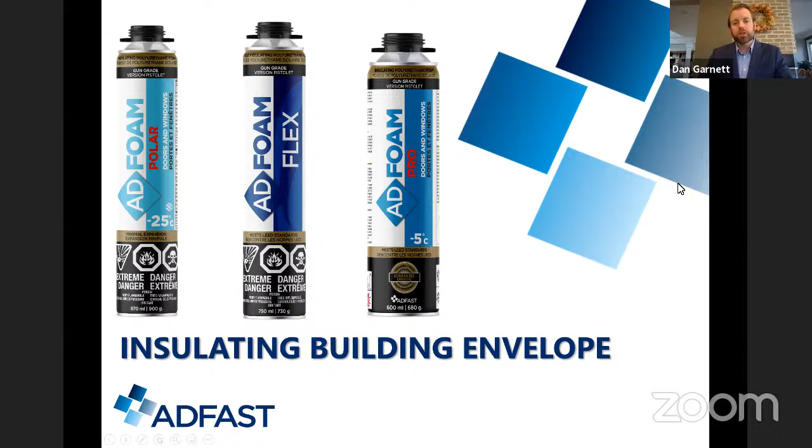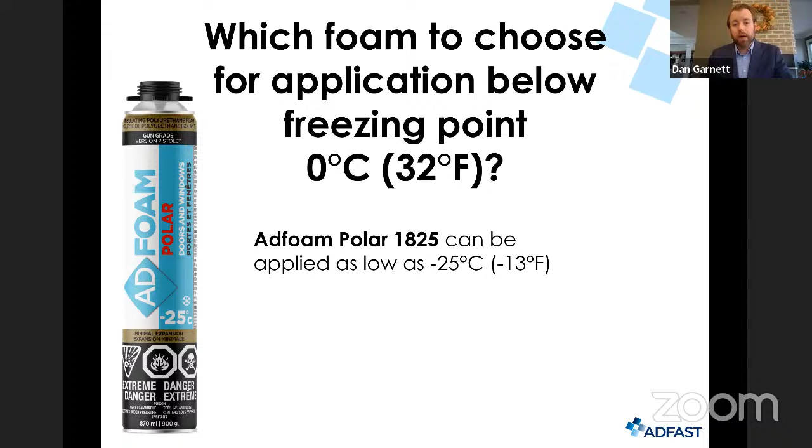One of the very first questions installers often ask is which foam is appropriate for an application below freezing point. For Adfast, we have Adfoam Polar for this exact application, which can be applied as low as -25 degrees Celsius. This is a fantastic solution for low temperature climate conditions where we still need to complete the work. So keep an eye out for Adfoam Polar, which allows installation as low as -25 degrees Celsius, much further below freezing point.

Another question you might have is which foam to choose when insulating openings on larger buildings that aren't in a cold environment. Do you want to use Adfoam Flex? Due to larger movement requirements, Adfoam Flex offers elongation of 36 to 38% to help with the movement of that particular joint. It can also be applied in situations above freezing.

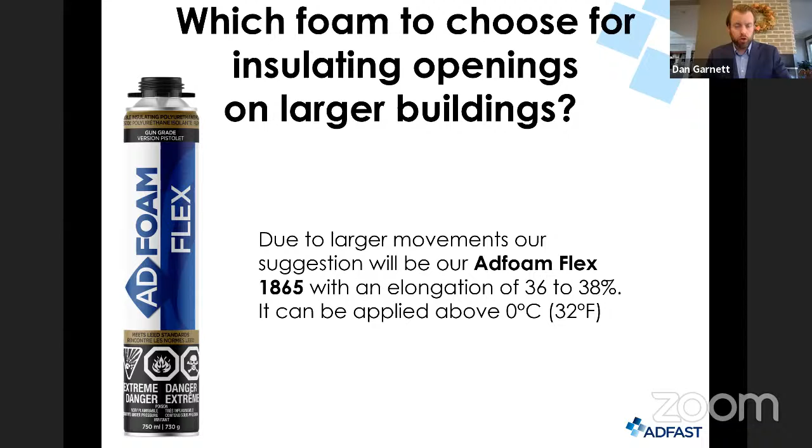We've got a video that will play here. We're streaming, so it might come across as a little choppy, but it's about 30 seconds in length, and it really highlights this movement capability and the flexibility of this particular foam. Take a look at our video here.

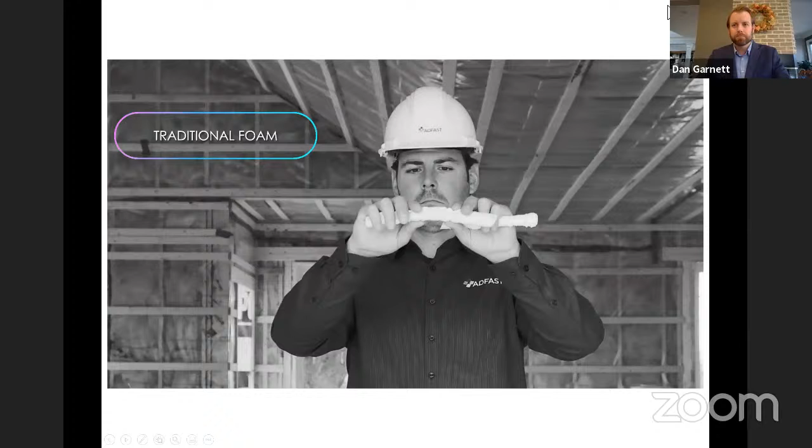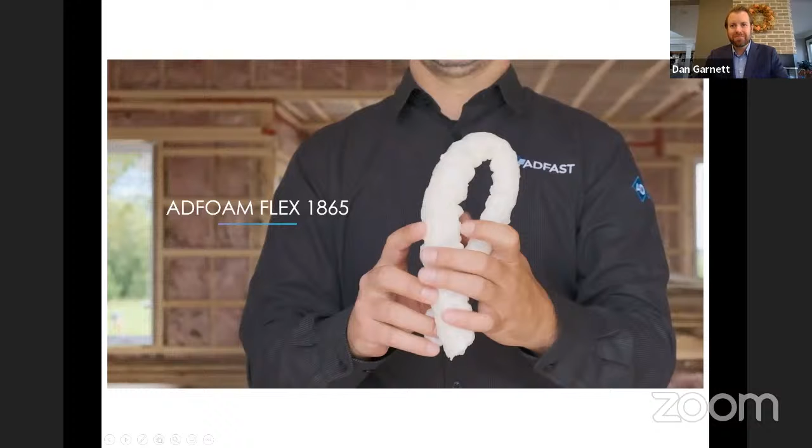Quite flexible, as you can see. Great flexibility, adapting to the movements of the joint, and it's not going to break.

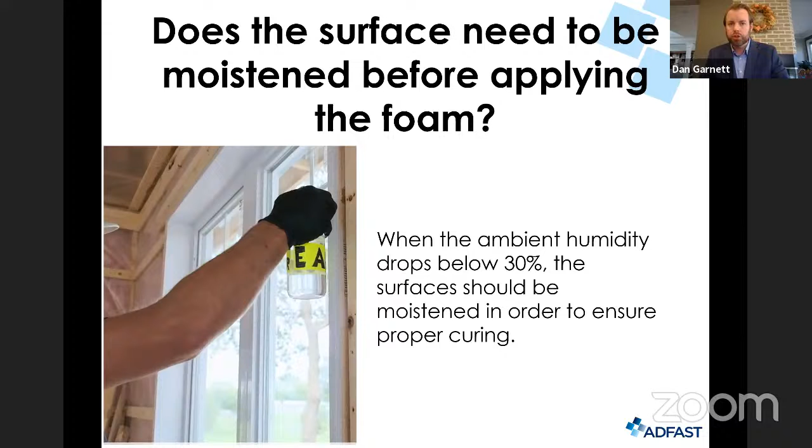We'll begin with surface preparation. As this is actually a moisture cure technology, it's drawing humidity in from the air. We want to make sure that if ambient humidity is dropping below that 30% point, we recommend that you take a spray bottle and moisten the surface prior to installation. This will help provide the added moisture so that it can cure properly.

One of the other questions here: does the can need to be shaken before application, and before each application? Yes, it is important to shake that. If it's just been pulled out of the case and we're getting ready to use it for the first time, it's important that we shake that product to ensure good molecular structure of the foam. We want to make sure and shake it for about 30 seconds, is what we recommend, manufacturer to consumer or installer.

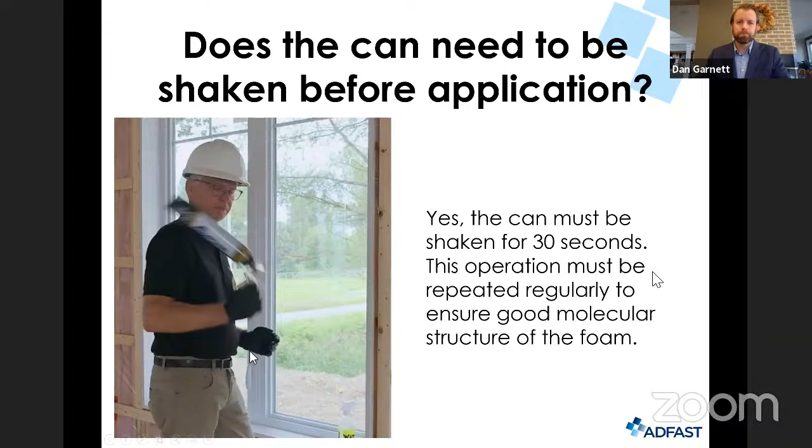Here's the thing, this is one of the most critical pieces of this. Of course, spraying and making sure the moisture is important, shaking to get the molecular structure correct is important. But one of the things we find often from the market is that the voids are actually not being filled properly. It's important to actually fill the cavity 50 to 60%. In order to do so, we need to make sure that we're applying 1 inch per application, a 1 inch layer per application.

So if you have a 6-inch cavity, we're going to want to have a minimum of 3 inches of coverage. What we'll need to do is apply the first layer for 1 inch, come back about 10 minutes later, apply another 1 inch layer, wait another 10 minutes for cure, and then the final 3rd inch to make sure we're getting that 50% coverage in the cavity. Otherwise, if we put it all in at once, the center won't actually be able to cure because it won't draw in enough moisture, since the exterior will cure fast enough but the interior won't get to the desired state.

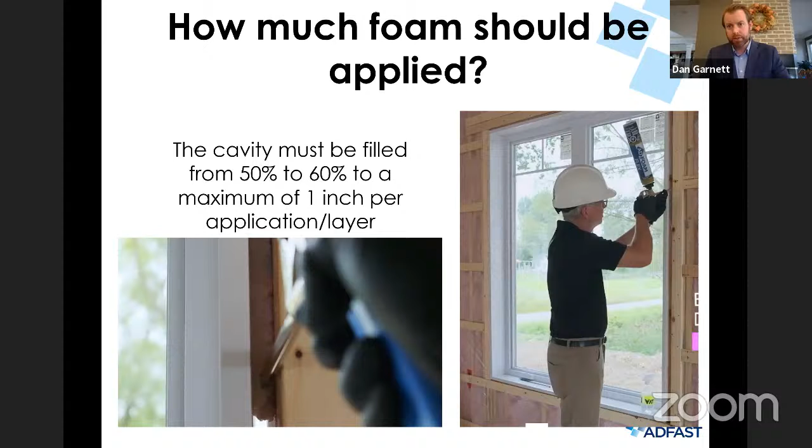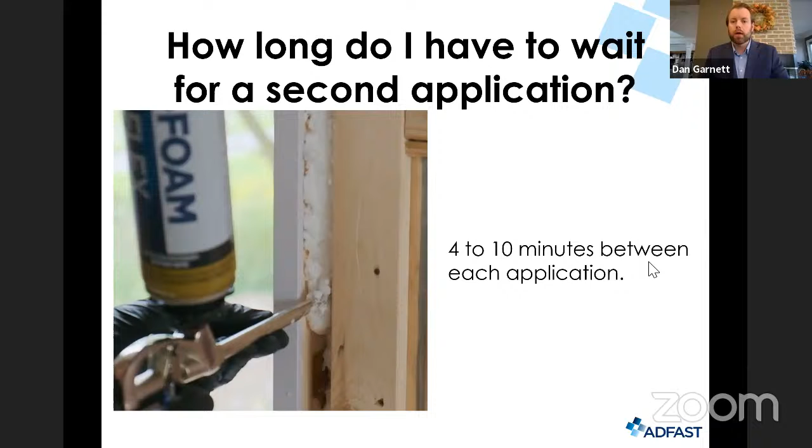How long do I have to wait for a second application? As I suggested, I referenced 10 minutes, but it may not even take that long. Waiting 4 to 10 minutes between each application is going to be great. If you're getting close to that 30% ambient humidity, it might take a little bit longer, closer to 10 minutes. But if you have a lot of humidity and you're doing the installation process correctly, layering it, it could be as quick as 4 minutes to reapply.

How long or how should foam be installed at the top of a window? We could use a ladder and get up, right? But why would we want to do that? It's not as safe and not as fast. What we want to be able to do is use some of the accessories that Adfast offers. We have an extension nozzle that can actually be bent, so the installer can really rock and roll and zip through these applications without having to move a ladder around or worry about other job site conditions, while also quickly dispensing product for the top bead.

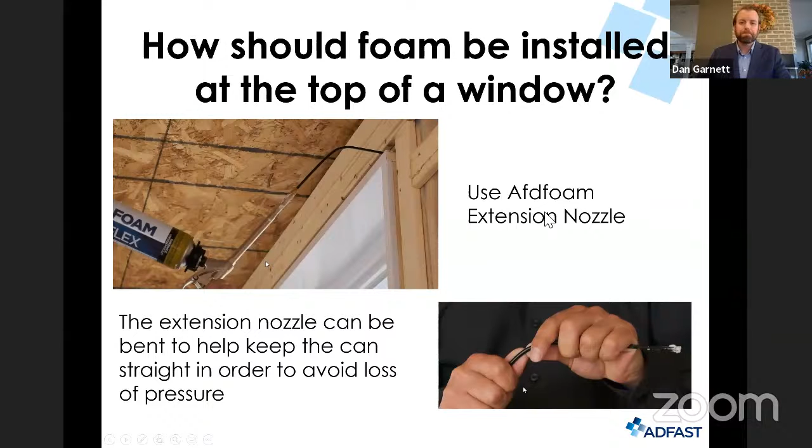This is a bit of a technicality. Depending on the thickness of the cavity, we recommend anywhere between 20 to 45 minutes, also depending on the type of product being used—is it flex, is it polar, etc. But it's strongly recommended to actually cut the foam on the inside of that particular cavity. That's going to help keep the skin intact on the outside, which helps maintain the water tightness of the application. So we're cutting the interior of the cavity, not the exterior, and that's going to help maintain water tightness.

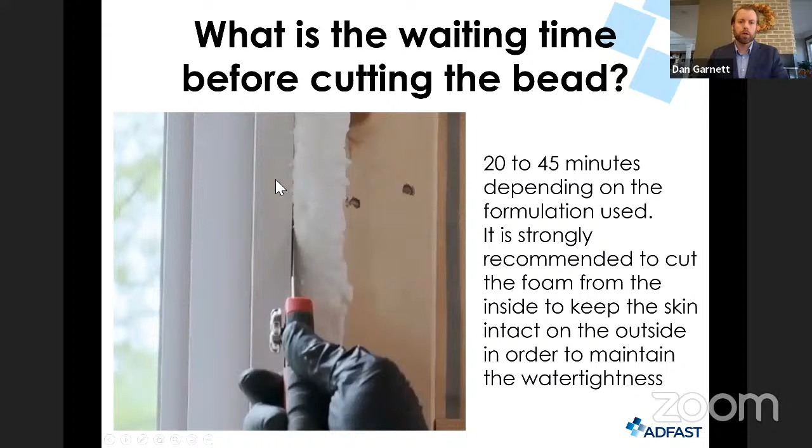This is a great caption here, good versus bad, but I'm pretty sure the pictures speak for themselves. We have Adfoam Flex depicted on the left-hand side, and it looks to be really nicely done. On the right-hand side, this is a project that didn't quite go as planned—might have had somebody who was a novice installing it, or just let the foam get away from them. So this is clearly not an ideal situation.

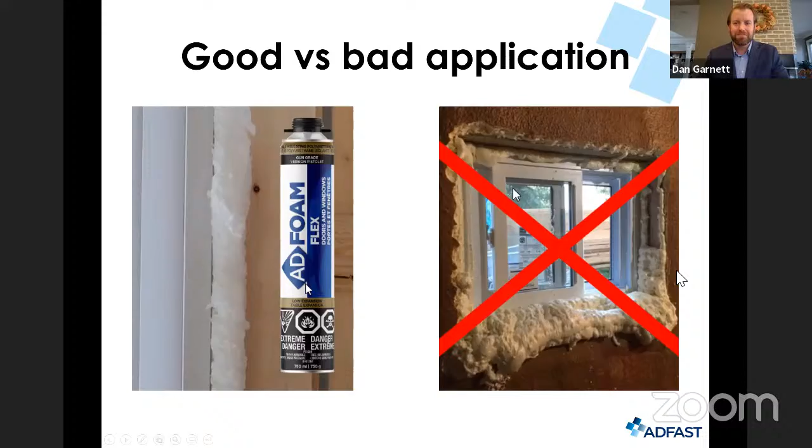One of the important pieces of this is we've discussed surface prep, the importance of procedures for doing multiple layers, environment, temperature, and relative humidity, etc., and also cutting on the interior of the cavity versus the exterior.

Now once the application's been done, it's important to remember, if you want your tools and guns to last quite a long time, proper maintenance is important. It's going to keep your applicator in good condition and allow you to come back to it time and time again to reuse that same gun. Otherwise, the foam itself will actually start to cure inside the tool and it will no longer be a viable option for you. A cleaner is a nice, inexpensive option to keep that tool working well—just running it through to clear it, and it's very quick. Just a few pumps clears through any foam in the line, and then you can leave the can on until the next application.

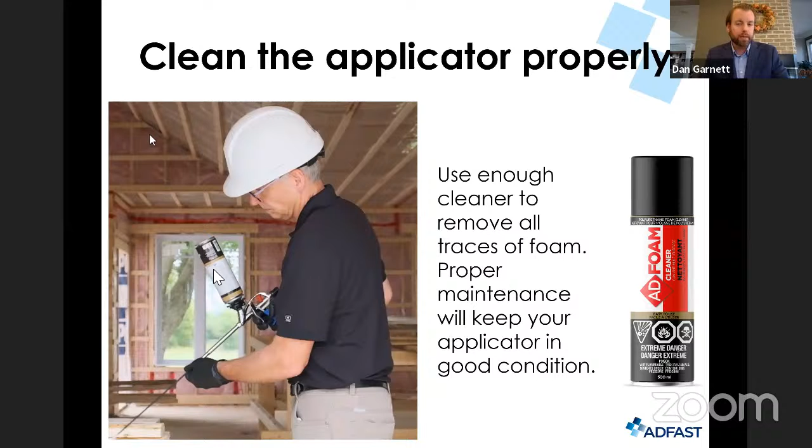Here's a closer look at some of the accessories that we have. This is a very popular dispensing tool, or gun if you will, for our foam products. You have the ability to put an extension on it, it just screws right onto the end. We have some customers who will even shave this down to a desired length, maybe 2 or 3 inches, et cetera. This is used across the board.

We have it in residential construction, commercial construction, and we even have people using these foams and accessories in industrial, OEM, production manufacturing situations at a high volume. Using the cleaner and taking care of the tool will help you have it for quite some time.

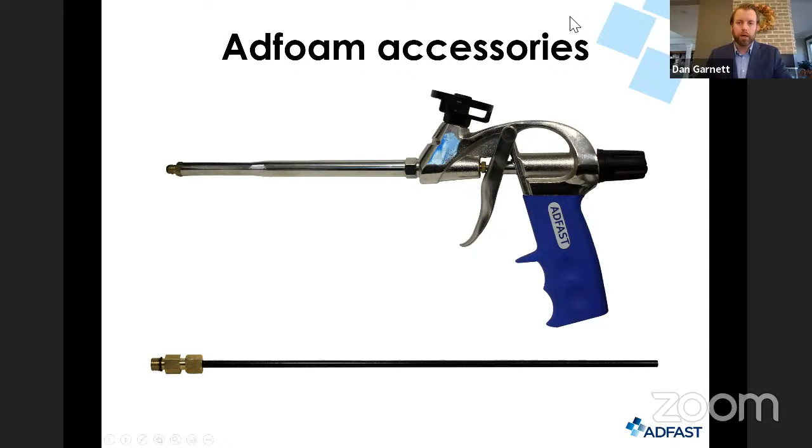So once again, this is Adfast, and we are a manufacturer of sealants, adhesives, and foams, as we just discussed. We are a North American manufacturer, a proud Canadian company based out of Montreal, but we have stocking locations all across North America and growing. Over 150 employees, and we've been around for just shy of 40 years.

And we're growing. We're on what we internally refer to as an Amazonian adventure and journey here, getting closer and closer to the end user by doing webinars and having conversations with customers directly from the manufacturer. That's our business model, and that's how we're going to market—not through third-party authorized distributors and resellers. We're providing technical consultative services to architects, engineers, GCs, CMs, all the way through the trades and into the industrial marketplace. We want to be there for you, partner with you, and provide that technical consultation.

So we are proud to be growing, and thanks so much for taking a look at the presentation. I'll kick it back over to you and see if there are any questions at this time.

We don't have any questions for now, but as we mentioned, you guys are going to be in the marketplace for the whole year, and I know a lot of people watch these webinars after the fact. So we know the marketplace is one place, but where can they reach out if they have questions?